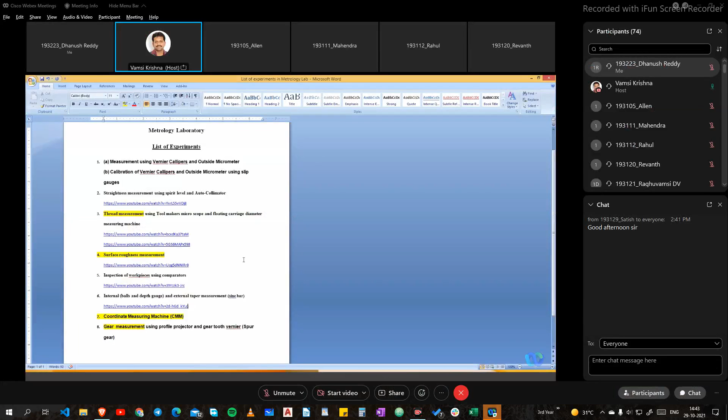Straightness measurement as well as the autocollimator, and this third experiment is thread measurement using the toolmaker's microscope and floating carriage micrometer.

Right, so is it visible? Thread is visible. What is visible to you? Is it a list of experiments or some PPT? List of experiments, sir.

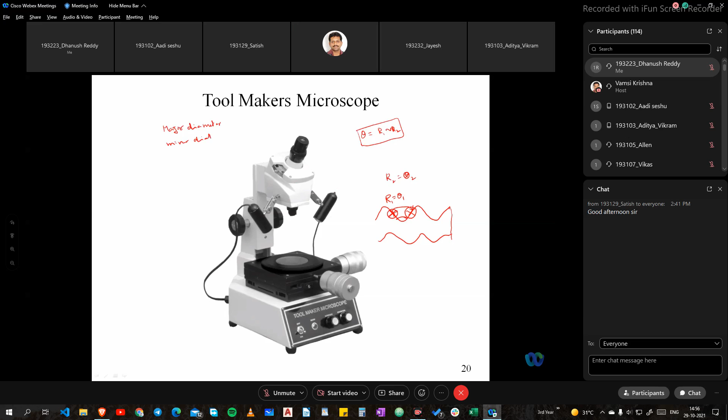So we can measure all three parameters using this toolmaker's microscope: major diameter, minor diameter, and the third one is thread angle.

So only thing is we have to work with common sense: which crosswire we are matching with which position. Again move to another crest, take the major diameter reading. Similarly, mark a root and move to another root, then take the two readings. So these two differences give minor diameter, and these two give major diameter.

Similarly, adjust the crosswire like this, coinciding with the flank, and without disturbing this position, try to rotate. If required, move this scale to shift the crosswire to this position, but the same crosswire needs to coincide with this one. Then the reading difference between these two readings gives the thread angle.

Like this, these three parameters we are able to measure. And also pitch we can measure by taking the crosswire to this root, this crest, or this root, like this, to measure pitch of the thread. So these four parameters we are able to measure with the toolmaker's microscope.

What is the another parameter important to measure in a thread profile? Effective diameter, right. So the next one is effective diameter. Can you measure this effective diameter in the toolmaker's microscope? No, sir. We can calculate it from major diameter, minor diameter, and thread angle. Why? It's theoretical, no, sir, or we can calculate it.

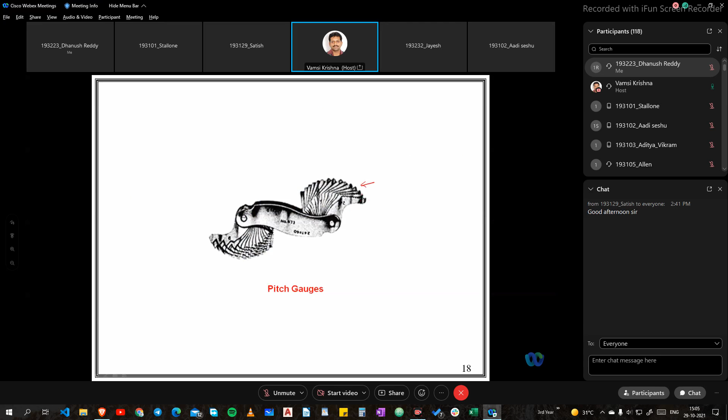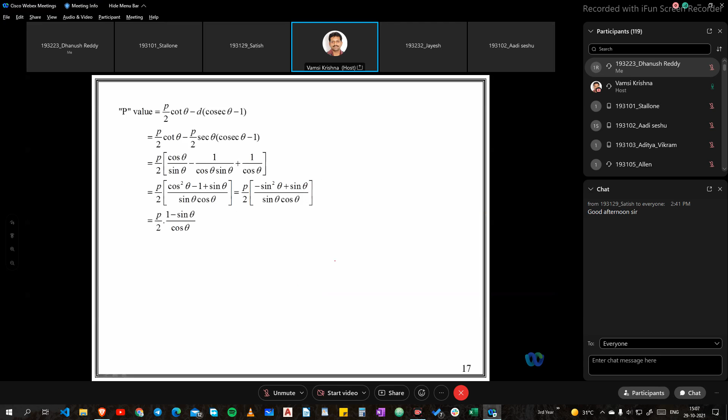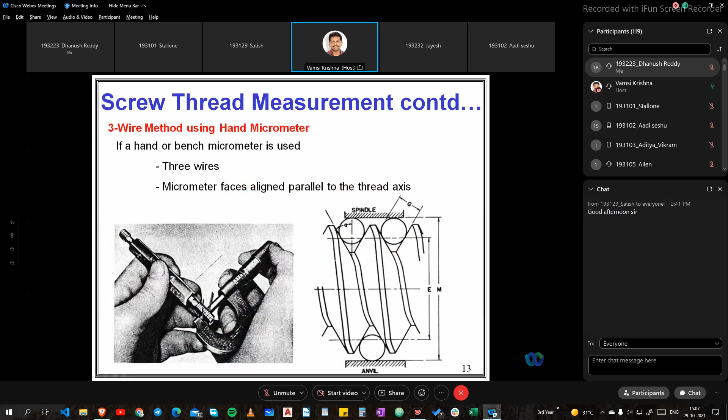I will try to give, of course here also derivation is there, but I will explain in the theory class in detail. Is it clear? So these are the parameters we are going to measure in screw thread measurement. Like this we'll keep the 3 wires and take the reading. This is measurement of effective diameter.

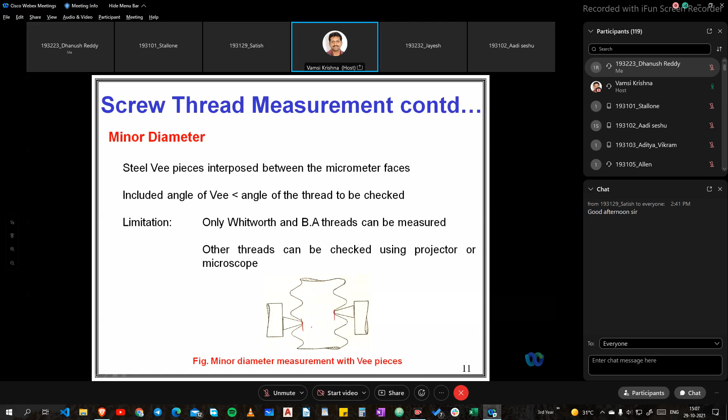So this is measurement of minor diameter. This minor diameter we can also measure with tool maker's microscope, or maybe by using the micrometer also, but micrometer anvils should be equipped with V type pieces. Then the reading we are getting is this one. This is the normal micrometer we use for measurement of minor diameter.

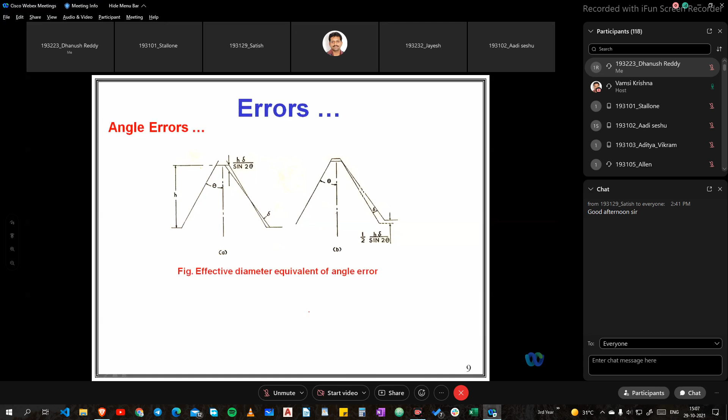Is it clear? So we can measure major diameter, minor diameter, effective diameter, and the pitch of the thread and the thread angle by using different instruments. Is it clear? Yes, sir.

Otherwise also, just give me 2 minutes. This is another instrument, optical profile projector. Here also we keep the specimen, and here we keep the graph paper or any paper, so that a small profile is visible, maybe 40 times larger or 20 times larger like that. So here the thread profile we can get in a larger view.

Now sometimes we take the trace of this profile, and by using a normal scale and other instruments we can measure these distances. Otherwise some equipment is integrated with software, and you can observe the same profile, fix point R1 here and point R2 here, and the software itself calculates the distance between R1 and R2 in the perpendicular direction. Then you can get major diameter. Like that you take R3 and R4, and give the perpendicular distance, so some software is there. This software is used to measure all the parameters from this profile.

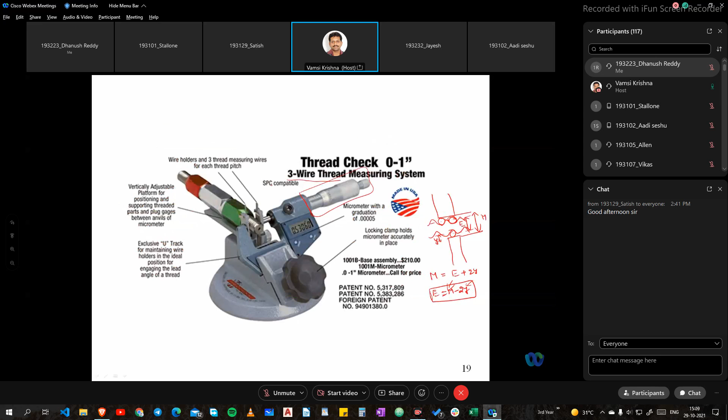But here also we cannot measure effective diameter, why? It is an imaginary line. So these are the different instruments we use to check the accuracy of the thread profiles. There are different instruments, of course all need not be used, depends on the availability. This one we can use, or toolmaker's microscope we can use, and these micrometers also, pitch gauges also, normal micrometer, floating carriage micrometer, etc. Yeah, someone is asking some doubt.

Sir, 2-wire and 3-wire methods are like same only, no sir? There is a difference that I will explain in the theory class. Okay sir, the contact is going to change. Yeah, yes. Sir, what is effective diameter? So important, why is effective diameter?

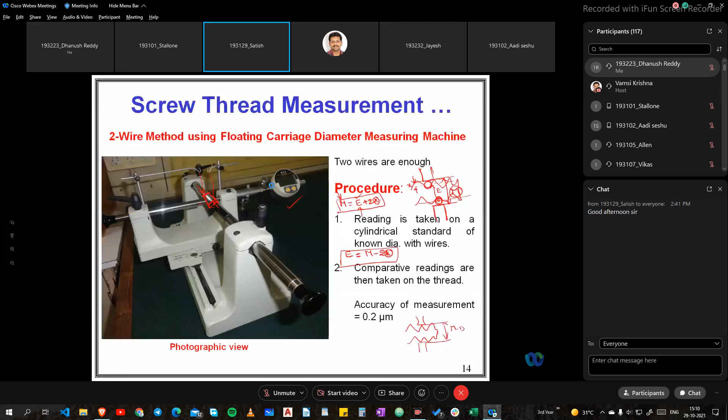I don't know whether you are from A section or B section. Did I explain in the last class?

Right, so this is the profile. So major diameter is this one, right? And minor diameter is this one, and this is the effective diameter.

So what is the definition of effective diameter? This thickness of the thread is equal to the gap between the two threads. This is the effective diameter. For example, when you are matching this nut with this bolt, the effective diameter of this one should match with the effective diameter of this one.

Otherwise, what will happen? When this part of the flank is mating with this one, the gap between these two should match with the thickness of this. Otherwise, what will happen? If this is more and this is less, then there may be interference. Otherwise, if this is more and this is less, then there is a clearance.

So all the profile is exactly matching, then only you can get smooth movement between the bolt and nut, and also there is no interference, there is no clearance, and the lifetime or functionality will be good. So that's why all the parameters should match in any assembly, both the male part and the female part.

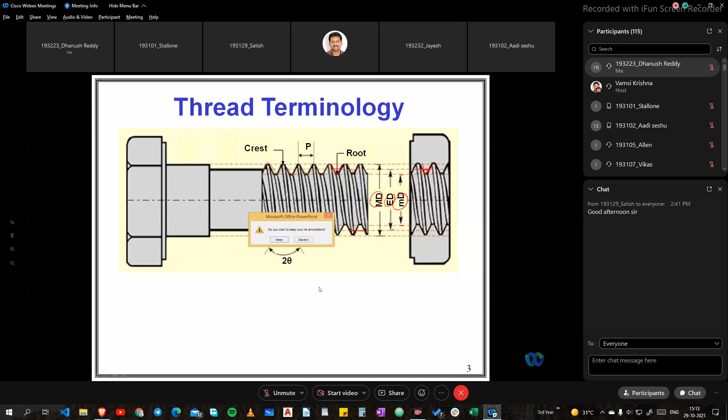So the next one is the surface roughness measurement. Surface roughness measurement also same, we are going to cover in the theory class, but anyway, I just want to explain.

So what is the surface roughness? Normally if you touch any surface, we feel a different feeling. Suppose if you touch your mobile screen, the feeling is different. Or if you touch your pen, the feeling may be different. Or if you touch your shoe or chappals, the difference is different. And maybe if you touch any door, the smoothness is different.

So what do you understand from these things? Any one of you? Surfaces are uneven.

Yeah, suppose if you touch your mobile screen, how do you feel? This is very smooth, right? Yes sir. But similarly, if you touch your notebook paper, it is also smooth, but definitely you understand the screen of the mobile and your notebook paper are not having the same finish, right? Yes sir. And similarly, even if you see your laptop or keyboard, the finish is different.

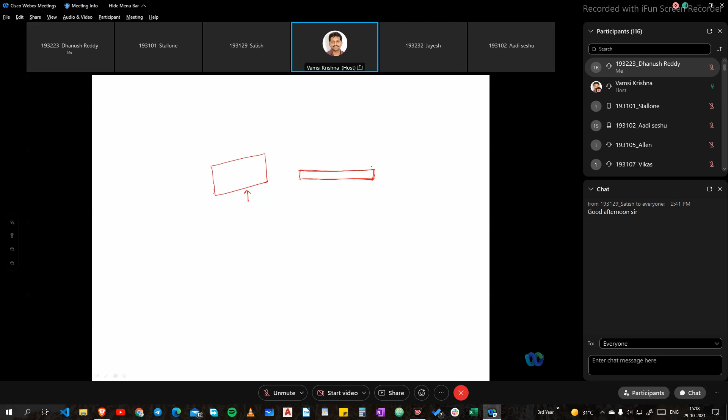So if you take any flat surface like this, and view it in two dimensions, this is the flat component. I am looking at it this way, and maybe I draw a line like this—we can say this is a flat surface, or this is a smooth surface. But how smooth is this? That is what's important.

So if you take some part of this surface and look at it under a microscope, it seems to be like this. Maybe you've all observed an ECG output—the profile of the surface will also look like this, from this point to this point.

This is called the sampling length—the sample distance I'm taking to measure this. This distance is the sampling length, and when enlarged, the total curve looks like this. These are known as peaks, and these are known as valleys. So there are peaks and valleys in the surface. We say it's a smooth surface, but literally, if you observe it in a microscope, the surface will look like this, and some surfaces may look like this.

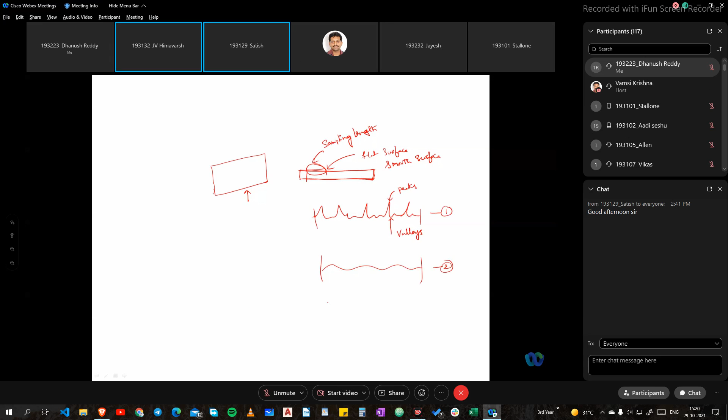So what is the difference between surface 1 and surface 2? Both are not exactly flat—some deviation is there—but what can you say about this one and this one? Surface 2 has a good finish. How can you say that? Because it has lower peaks and valleys. The roughness is different—the roughness height, which is also the average roughness height, is different.

So this is the third surface. Now tell me, which one is good? Surface 2. Okay, so you discard this one, you take 1 and 3, then you can say...

This one we cannot say, because if you see this height and that height, they may be the same, but it seems to be smooth. But if you observe again, the surface may be like this, something. So that is why we have to measure different parameters on the surface to evaluate the smoothness, to evaluate the finish or quality of the surface.

These parameters are of different types—one is RT, another is RZ, RA, RMS, etc. All are roughness parameters, but this is one type, this is another type, and so on. Depending on these parameters, we can say whether it is a smooth surface or rough surface, and what the smoothness value is—whether it's within the acceptable limit for a particular application.

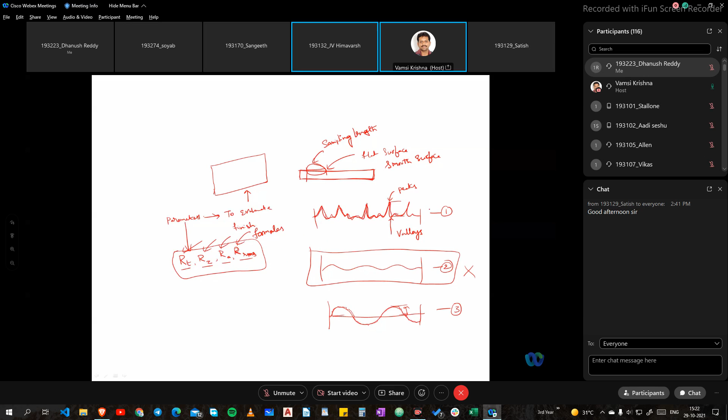This measurement of surface roughness is normally of two types—one is contact type, and the other is non-contact type. Under contact type, we use stylus instruments. Within stylus instruments, there are different types, like Talysurf, profilometer, or Taylor Hobson, Tallygraph, or Tally...

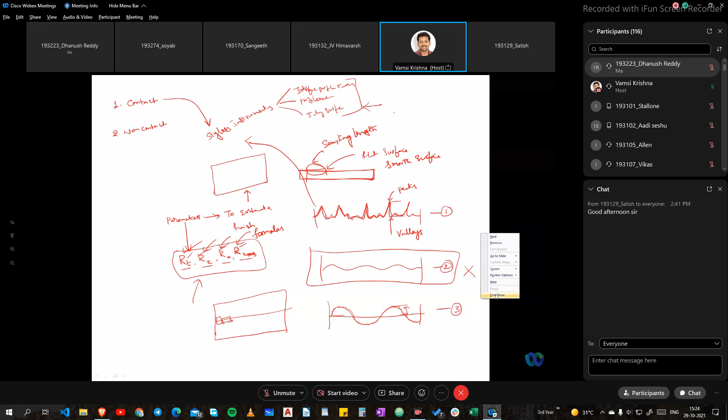But here, what we need to understand is how to get this graph—that's it. So the instrument available in the lab—we'll take one workpiece, any workpiece, place the instrument on it somewhere, and switch it on. The instrument moves a certain distance, and within this distance it captures the profile. From these profile values, using software, we can note down the values, and after seeing these values, we can take a decision. So we have a surface roughness tester for this.

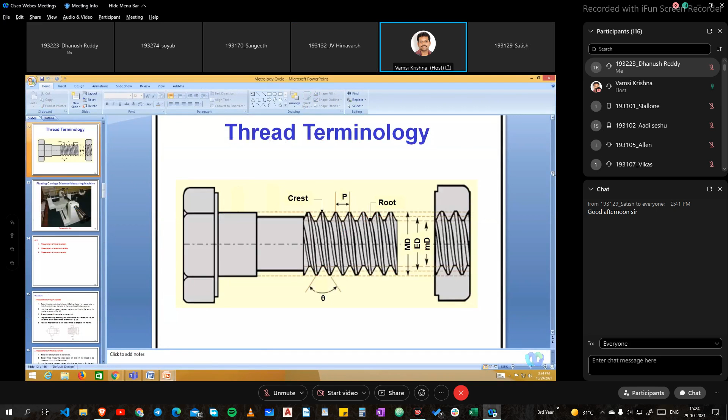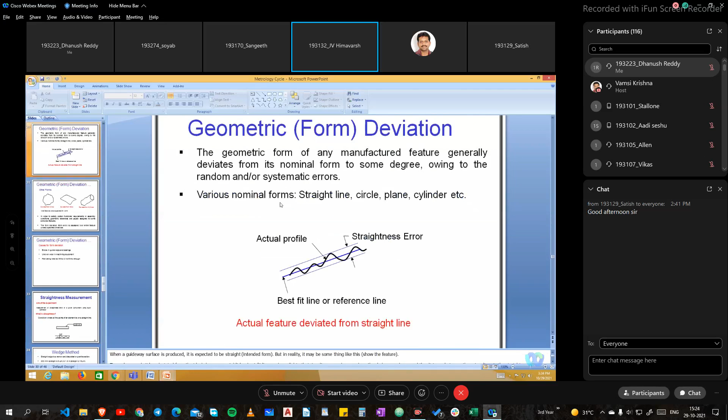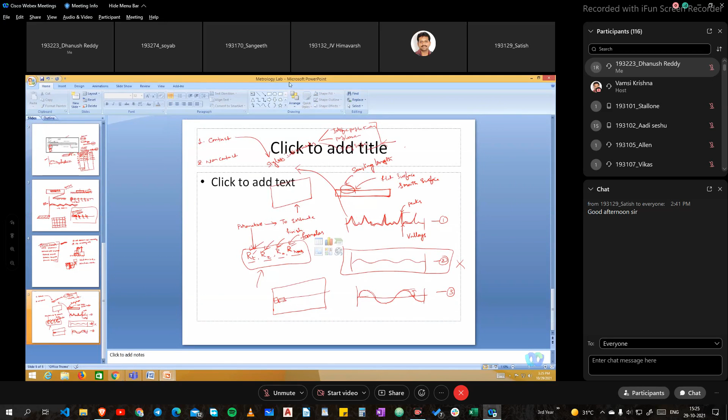So I'll show you—just give me a second, I'll show you that one.

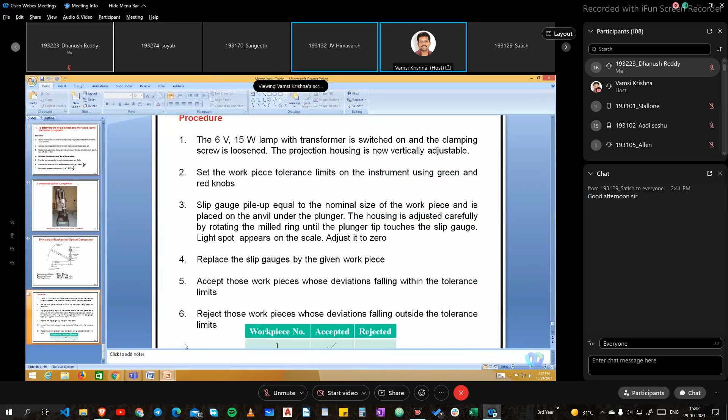Anyone? Is it audible or not? Yes, sir.

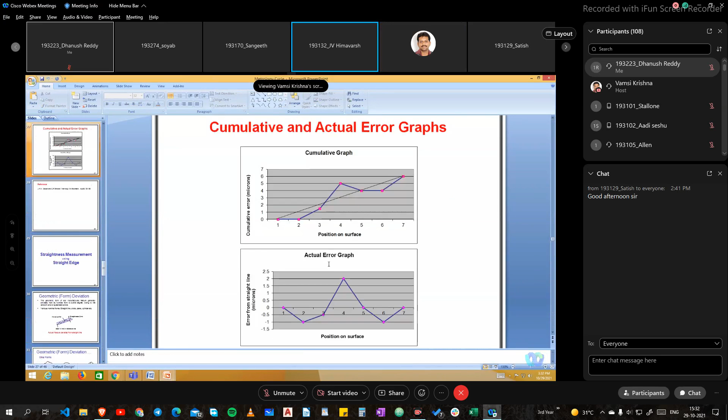Then another experiment is measuring the taper angle on internal and external surfaces. For that, we use a sine bar, and we already discussed this sine bar.

This is taper measurement. We already discussed about the sine bar in the theory, so I think I need not explain again, right? All clear? Yes, sir.

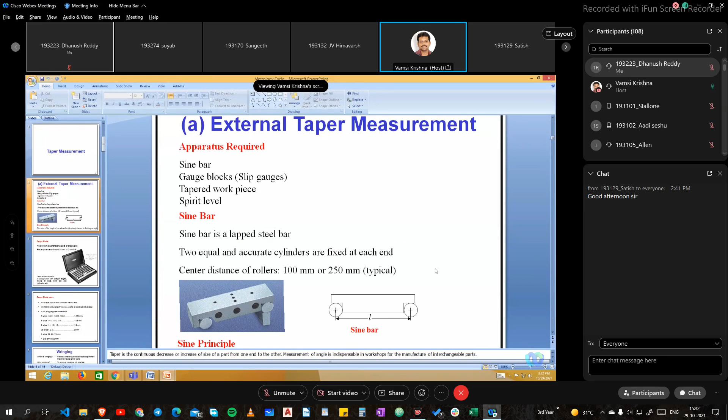So we have a sine bar, we have slip gauges in the lab. We take any component, and we can measure this angle by using the sine bar principle with the help of slip gauges and sine bars.

And another one is there: this is the measurement of internal taper of any specimen. Suppose we have a circular specimen and inside we have a taper hole. So how to measure the taper angle of this hole?

For this, you don't require any metrology knowledge, this is a normal thing only, right? So initially we keep one roller.

We keep this cylinder on a slip gauge, and this is actually a surface plate, etc. Initially we keep one roller, and above the roller we keep a vernier depth gauge, and this anvil goes and touches here, so we can measure this distance H2 from this measurement.

Is it clear? Do you understand? Yes, sir.

So this is the specimen, and I'm keeping one roller here. Here we are keeping a vernier depth gauge, and this anvil is going and touching.

So here we observe the reading of this one, like this. So we take the reading here, and this is H2 we can measure.

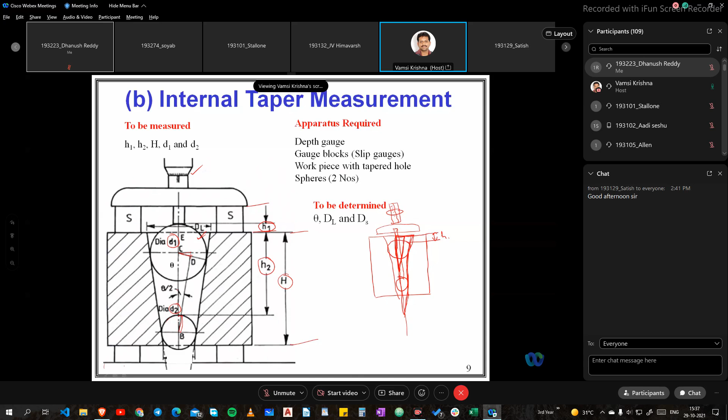So in the figure you take this one as another triangle. So here also you can get one triangle with this roller, and with this also you are getting one triangle. So from similar triangles formula you can derive that angle, that is with a small trigonometric relations. We can able to find out what is the theta value.

If you have a metrology textbook, in that one we have one chapter that is miscellaneous measurements. In that chapter, this type of so many examples are there. Only thing is you require just a common sense how to measure these parameters, and then you require some trigonometric relation or triangle relations, etc. From this one we can able to derive this angle by the similar triangle principle or something.

So just you try to derive this one on your own. So you can get this relation for this one. Maybe suppose this is like this and this is the depth, then this may be going to change. It may be plus.

Do you understand what I am saying? Yes, sir. Like that, this plus or minus may be changed, but only thing is you have to derive the relation for this angle, depends on the position of the roller. So this one, note down figure and you try on your own this derivation. This is just a simple triangle formula, similar triangle formula from the simple trigonometric relations. The only thing is you have to find out this angle from this one and from this one.

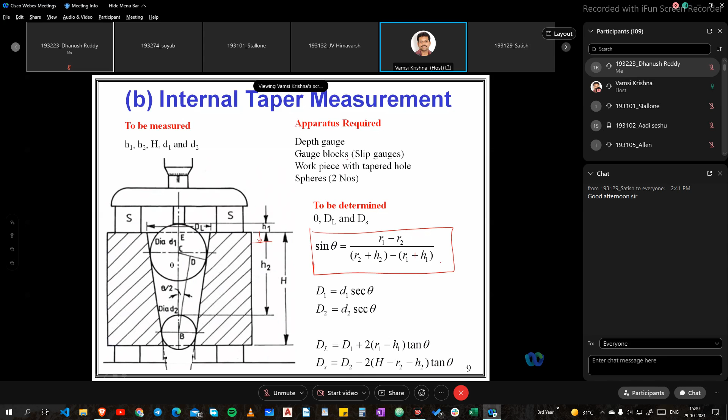Right, so these are the different experiments, and two more experiments are there. One is coordinate measuring machine, so that is also I cover in the theory part, because again that is I need to explain about the machine and the different machine techniques, etc. And also another one is same.